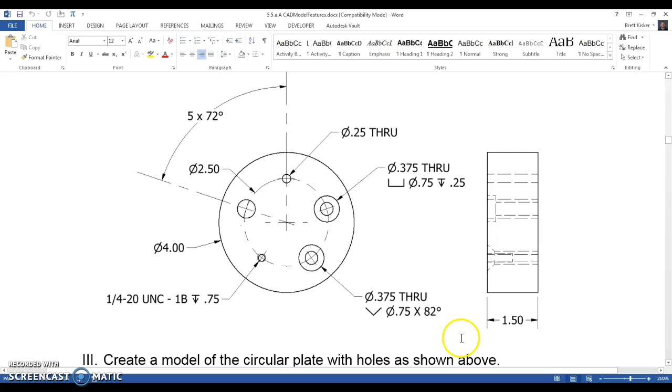I think if I'm going to create this part here, the first thing I'm going to do is notice that there's a diameter of 4 inches for the circular part. It's a cylinder and it's 1.5 inches thick, we see. So in order to create that, I'm going to go over here. I'm going to create a new part. And instead of starting a 2D sketch, I'm just going to start a cylinder. I think that's the easiest thing to do.

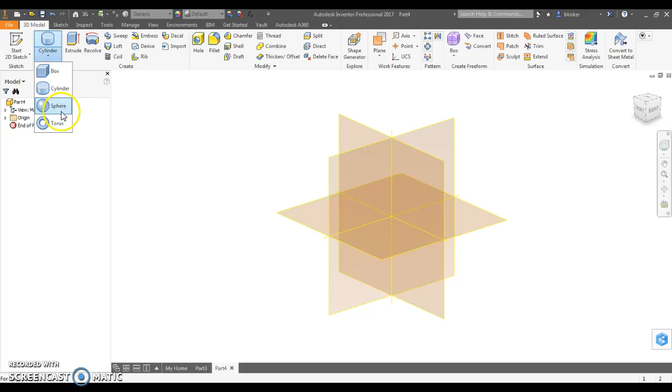If you're not able to see the primitives tab, you need to come over here to the drop down menu and make sure that the primitives box is checked. That gives you access to all sorts of basic shapes. In this case, a cylinder is what we want. It doesn't matter which plane you choose. I'm going to choose the XY plane. I'm going to start drawing from the center point. Notice I've got the green dot, so I'm locked in. I'll be fully constrained with a diameter of 4 inches.

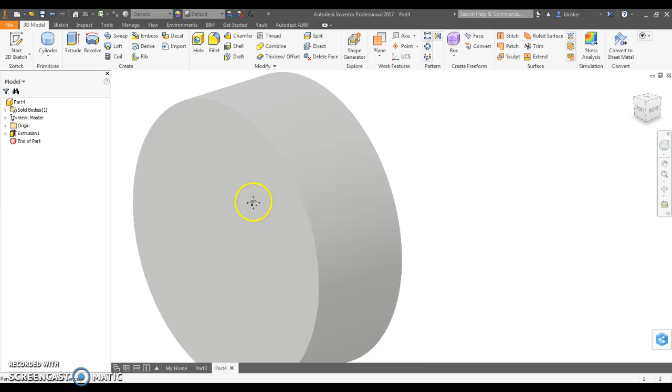And it automatically goes to the extrude menu, and I've got to go a thickness of 1.5 inches on the cylinder. So now I've got at least the cylinder placed. I don't have the shadows and stuff, which by the way are in the view tab. If you want to add shadows and stuff, you can do that. Okay, so here I have this. Now I need to draw a new sketch on the front surface. On the front surface, I'm not going to do circles and extrude. That's not what this is about at all.

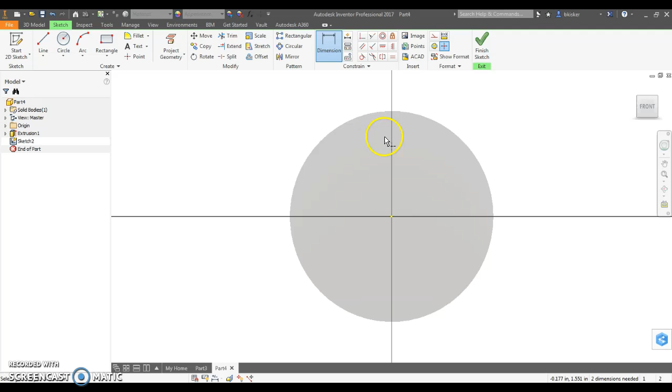When we're going to use holes, you're better off placing points. The point tool is right here. I'm going to place the first one. Now I need to dimension it. If you look at the dimensions on the activity, it tells us that it's a distance of 1.25 inches from the center. I'll let you find that. And the other thing you'll notice is that it's not fully constrained. It says one dimension still needed. This means that this can revolve. Let me show you what that means. I can still move it around and keep it at 1.25 inches. I'm not breaking any rules, right?

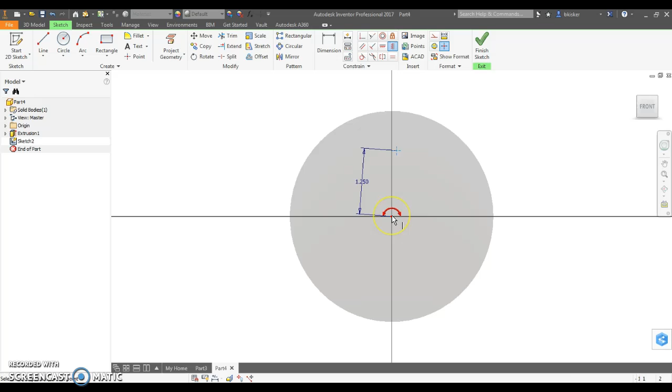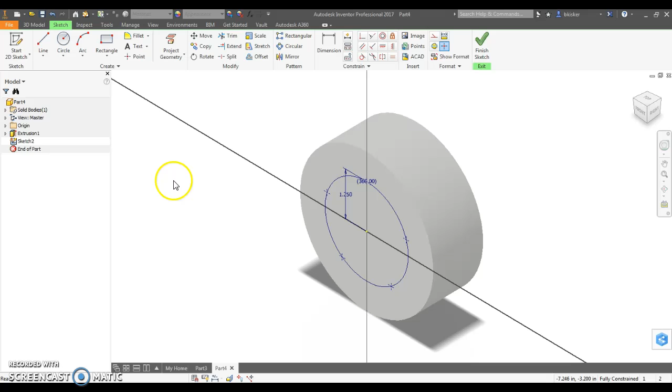So real quick, I'm going to do a quick vertical alignment. This point needs to line up vertically with the center point. Now I'm locked in, okay? Notice I got out of the vertical alignment tool. I'm going to go circular pattern. When I do this, I think it's easier to look at it from an angle. The thing I want to circular pattern is this point. The axis that I want to pattern around is the dot in the middle. I don't need 6 dots, I need 5. So I'm going to create 5 points. I'm going to click OK, and you'll see now that it has 5 of them placed in symmetrical fashion all the way around the cylinder.

I'm done with my sketch. I'm going to finish the sketch. Now I'm going to show you just one of these. So now that we've got 5 points, I'll show you the first hole. It's just going to be a straight hole. But notice what happens when I click there. It wants to use all 5 at once. If you hold down the Shift button and you click on the center points here, you can deselect until you get down to just one. That's the only one that I want for the first one. It doesn't matter which of the 5 you do, by the way. But let's just choose this one.

According to the dimensions, it's a 1/4 inch diameter hole, so that's perfect because 1/4 inch is what it defaults to. The termination, it says all the way through. Instead of going down a certain distance, it's going to go all the way through. And this is just a straight hole. I'm going to click OK, and I'm done with that. Okay, now that's the first hole. The question is, I created those 5 points. How do I get those 5 points now to be available to me because I want to keep using them? I want to use the other 4, right?

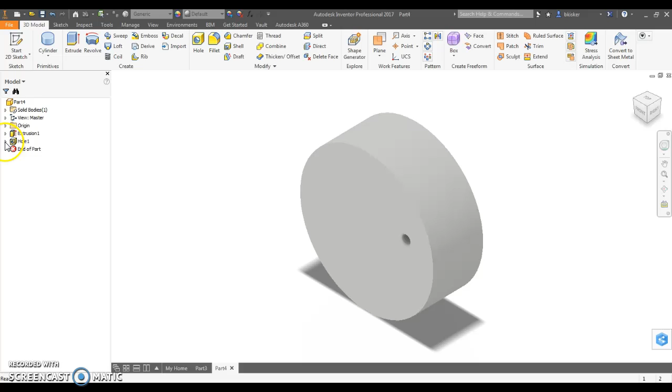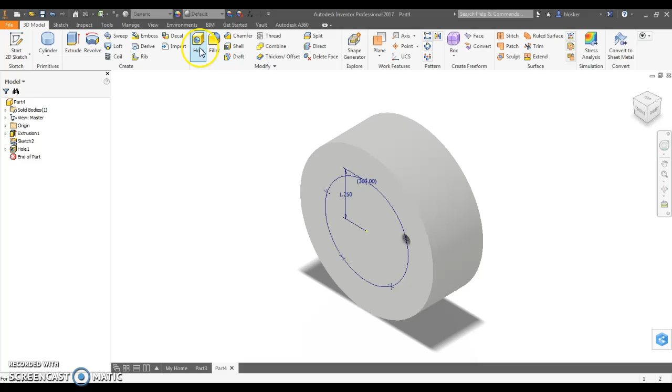Well, in order to do that, I come over here and expand my menu for sketch 1, and I find that's not what I need. How about this? Sketch 2, the one with the points on it. I'm going to right click. This is a neat feature. I'm going to share the sketch. By sharing this sketch, you'll see that now sketch 2 appears inside of the hole 1 part in our browser, but it also is over here on its own. That means I can just reuse it as often as I need to. So I can go back and choose hole, and look, it chooses the other 4.

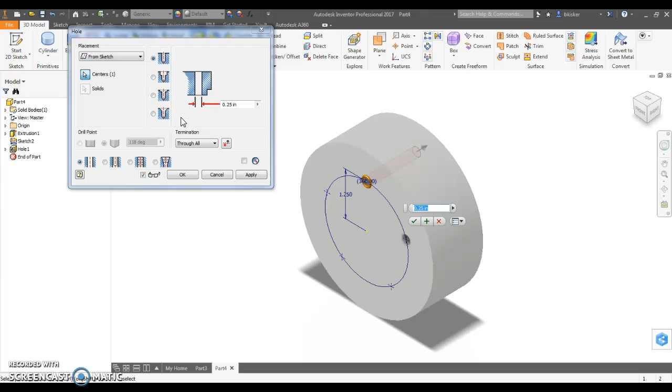I have to go through the same process of holding down shift and deselecting the others, and your job from here on out is to follow the instructions and change the type of hole you have from a straight hole to a counterbore, countersink, whatever, and just make the menu match whatever it says in the instructions. It's just practice on different kinds of holes that you're creating. That's why it's called this. Hopefully that helps out and gets you going on this holes practice for activity 5.5 in IED.